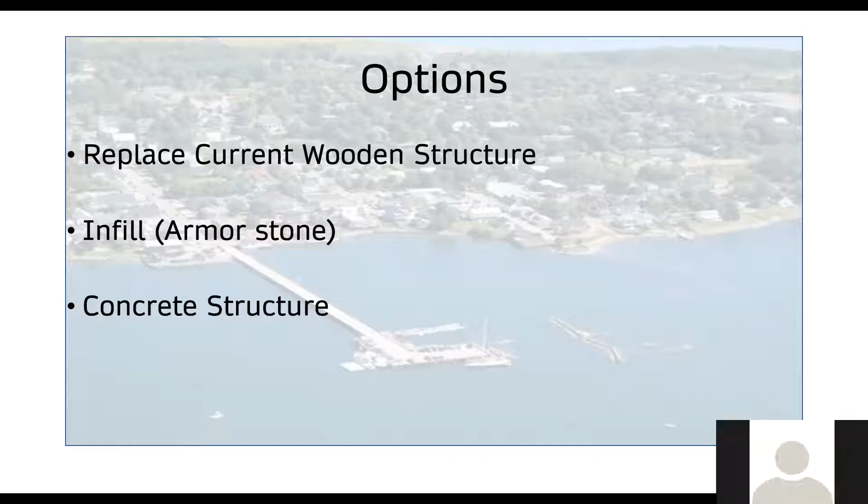Tonight we're going to look at 3 options that came across our boards over the last few months. One is to replace the current wooden structure, pulling out the approach, roughly the first 70 to 100 meters of the wharf, and replacing it with more wood. The next, the hotly contested one, is the infill or armor stone version, which we'll have some different concept drawings and renderings to look at tonight. The final option is a concrete structure that has been brought forward, which can also be looked at as more traditional in its look, but has a superior quality as far as its longevity.

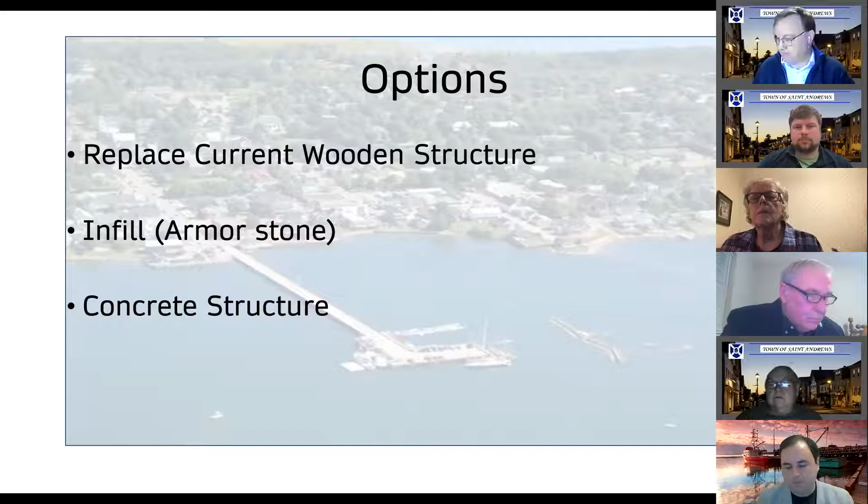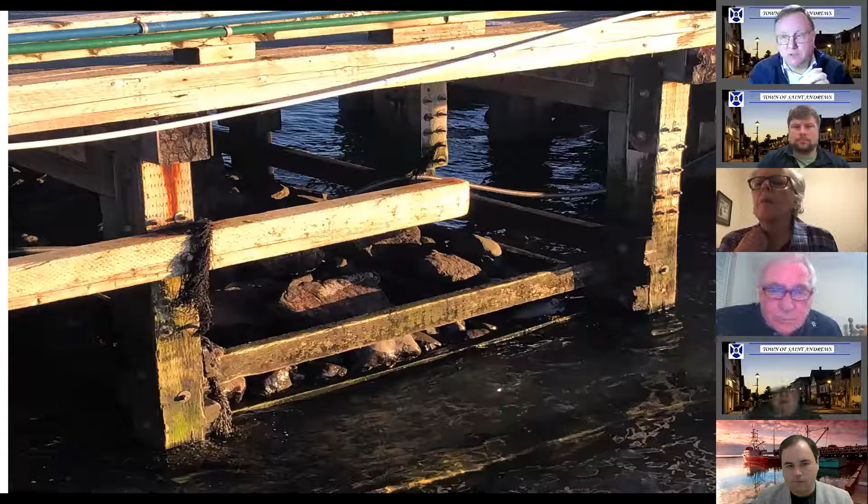So we're going to jump right into the wooden structure. This is a picture of our wharf taken today. As you can see, the structure essentially is 10 by 10 posts on the ground that have ballast boxes at about 50-meter intervals, with large rocks that basically stabilize the wharf. If you just had the wooden piles on the outside holding it, the wharf would likely suffer from wave action. So back in the day, they designed these rock cribs to stabilize it against the tidal action, as far as I can tell.

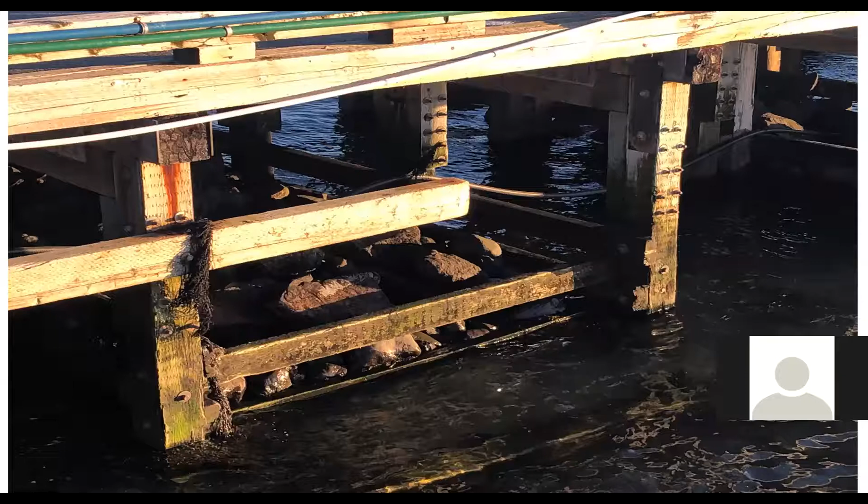Now, to do that work just on the wooden structure, you're talking about $3.4 million upfront cost. But because it deteriorates much faster than other options, the 60-year life cycle cost is actually $6 million, which is a significant price tag. Essentially, we'd have to replace that wharf once over, on top of the repairs and maintenance we'll be doing over that 60-year life cycle.

Now, the pros that a lot of people like is it does maintain the original look of the wharf. The town is based highly on heritage and our history, and people think that's a really important aspect, and staff understand that. Of course, it'll blend in with the remaining structure much better. But again, we're just talking about the approach, the wooden structure that makes up about the first third of the wharf. The problem with that structure is it's harder to accommodate for sea level rise.

The price we have right now, the 3.4 million, doesn't accommodate for that. They're going to have to do a little more studying to figure out how to make that work. And as mentioned earlier, the wood deteriorates much quicker, so sections of that wharf, as we've had to do in the last 10 years, would likely have to be replaced after 25 or 30 years, until the whole use of the wharf was deemed unsafe. This won't mean much right now, but we'll get into it in a bit — there's going to be a smaller width of the wharf compared to the infill structure.

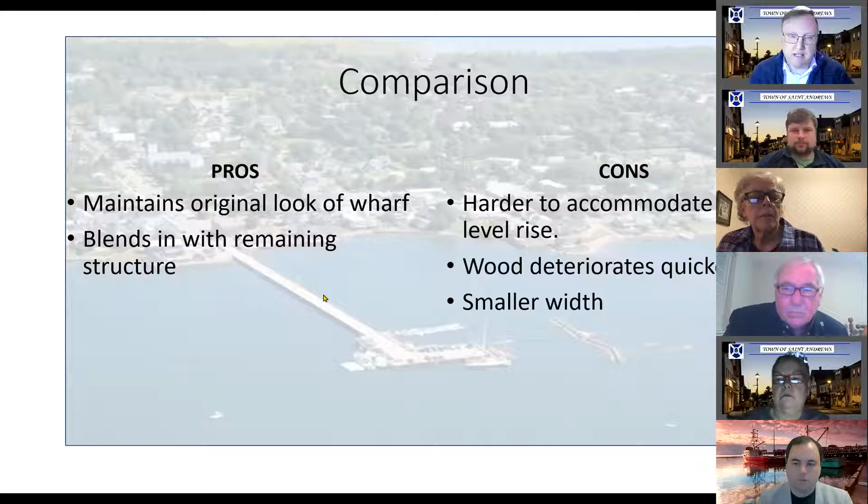Now the next one we're going to look at is the armor stone infill to replace the approach. So again, the first third would be armor stone out to the remaining concrete and steel structure that we know today. A lot of this was already presented back on December the 14th.

So we did make some changes as requested by council, primarily regarding this building. Can you guys see my mouse? You're not showing. Yep, okay.

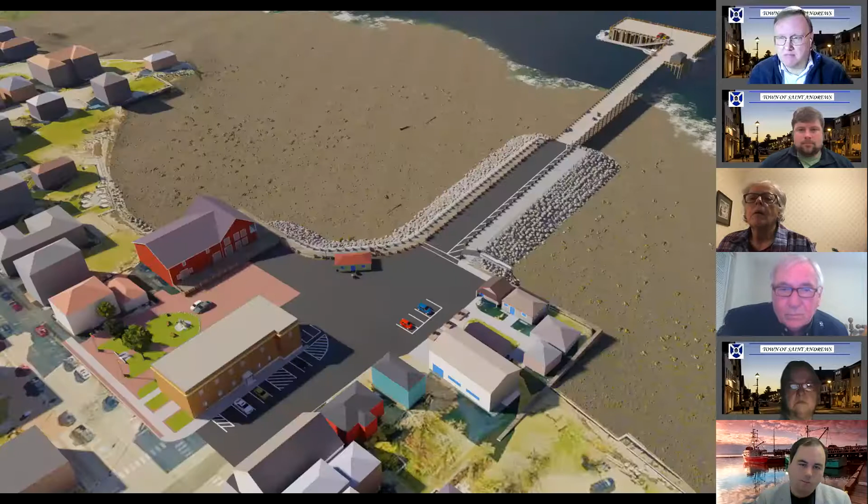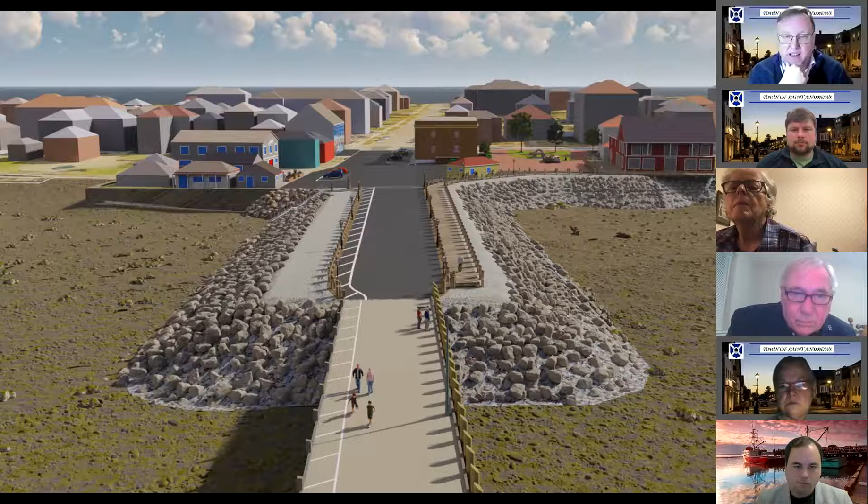In the middle of the picture, you can see what we'll call the Island Quest buildings at the corner of the wharf, on the upper side by the Anchor Restaurant building. You can see it's to enhance the view, so if you're coming down King Street you get a better view of that. Coming from the other direction, from a bird's eye level view, if you're standing about 20 meters above the shack, you'd see that the wharf is tremendously wider. As you can see, and we'll show pictures later, where the people are walking is the width of the current wharf — the inside lines on the left side, and the inside of the walkway on the other, mark the width of the current wharf, which is the outside edge of it. So you've got a tremendous amount more width that can accommodate so much more potentially going down the road.

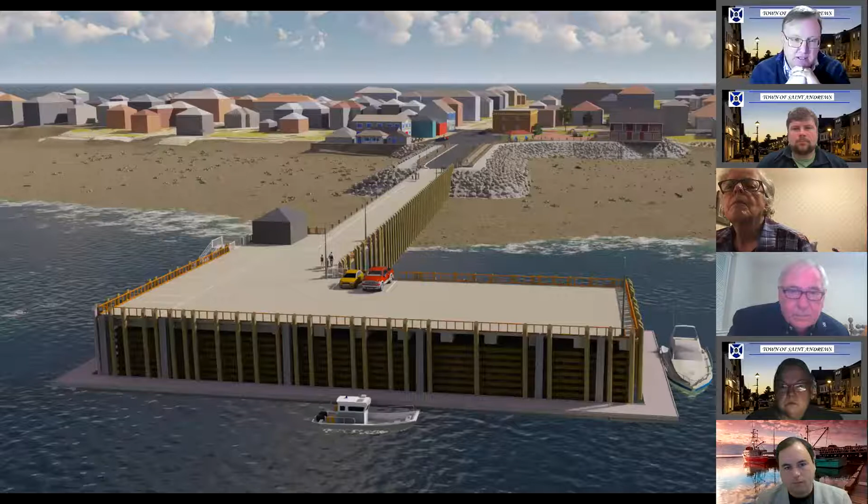Councillor Grew had asked about a staircase on the other side. That's not recommended because, as Councillor Gubershall noted from talking to staff, it's really mucky on the other side of the wharf and people have lost boots there. Even though it's relatively close, it's a completely different type of topography, so it probably wouldn't be safe to send people over there.

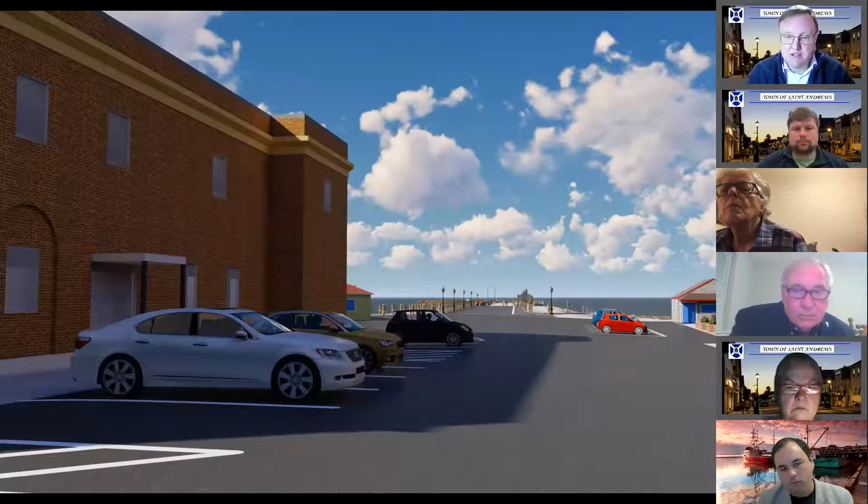This is the view from the corner of King Street and Water Street with that building removed, allowing a much broader view of the water. This is important to council for the street ends, providing a panoramic view for tourists, visitors, and people approaching the wharf from Water Street for the first time or the thousandth time. It gives a much wider open concept view, with Navy Island visible on the other side, providing a great environment to look at.

This view is essentially if you're standing on a ladder in the middle of Water Street, almost on top of the Red Herring building, showing how it looks from a bird's eye view.

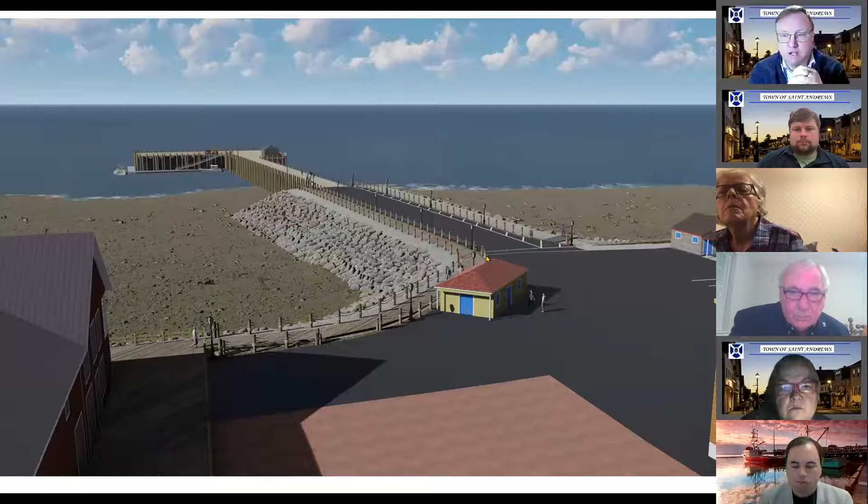It should be noted how much larger the square is too, which is beneficial not only for farmers markets but will allow for a little bit more parking for events like Canada Day and other events such as Paddle Fest hosted in Market Square. It's certainly going to provide a significant amount more space for them to work with and to host events.

If you're standing on the wharf, this rendering shows what the rock would look like from a normal person's point of view. As you can see, although it's visible, it's not taking away from the viewscape very much, especially with the posts along Market Square and along the wharf that maintain the nautical theme, along with ropes that also maintain a safety aspect for anyone going along the wharf.

Now, the change in width as discussed earlier: the current deck width is 7.2 meters, and the infill option with the prices we show is the only one that allows for a wider wharf. With the infill, it increases the width to 22 meters, or 72 feet, so you're getting almost 3 times the width, which is great for safety.

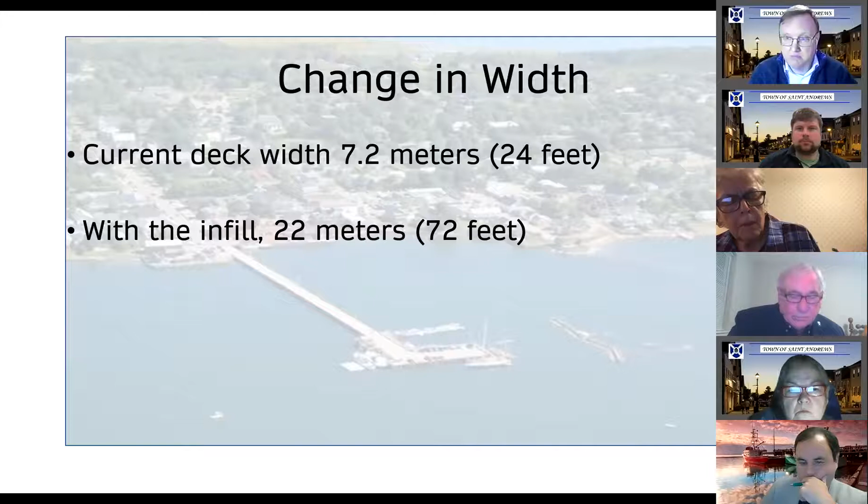It's also good for some of the options we've talked about, like increasing more seating along the wharf, or even having ticket booths or some type of retail as you first go along the wharf. Really, this is the only option that's going to make that viable with the current budget we have to operate with.

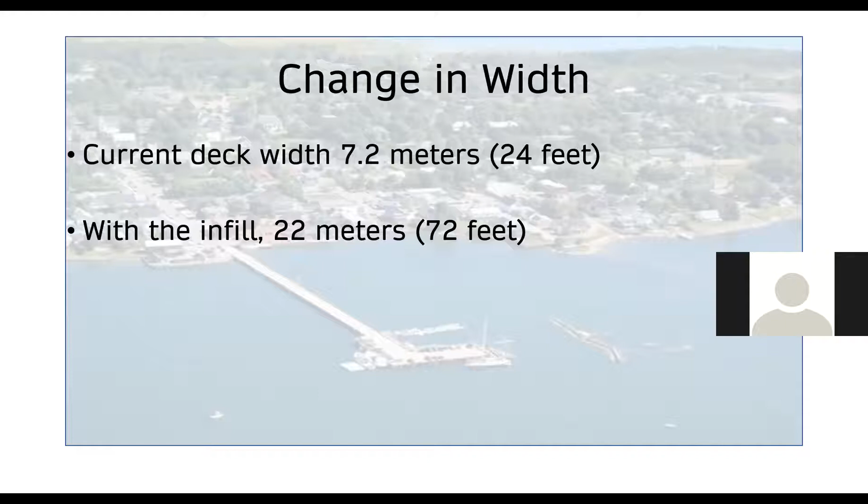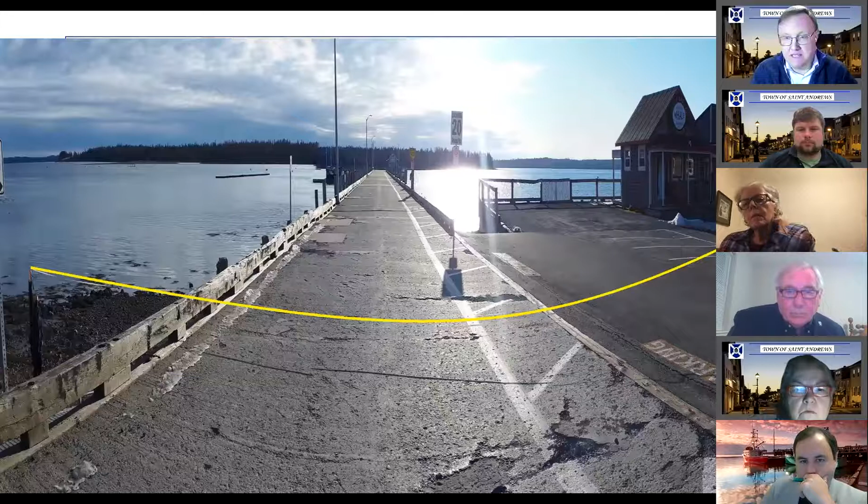Is this really showing what the width of the wharf is compared to the current wharf? That's Terry Acton on the left there and me on the right. As you can see, the current wharf at the top is going to be going from the front of the parking lanes there on the right over—this picture will show better. Whoop, didn't bring that picture, I guess. Oh, there it is, sorry, skipped it.

So the same thing—it goes about halfway to where the current Island Quest building is, so it's a significant amount of width being added. It's got pros and cons. From a practical use, it's going to give the ability to do a lot more on the wharf. The negative is it may not be as visually appealing. Again, it's been raised, and staff are going to have to ask the question eventually about what this rock interface will do to the tidal flow in that part of the bay.

From a cost perspective, in today's dollars, in order to do that infill you're looking at about $3,183,000. The 60-year life cycle cost of that is about $4.5 million, so significantly lower than the wooden structure we discussed a little earlier.

As discussed, the wider width does allow for more uses, and there is a lower cost. The other important thing is that if we assume the current sea level rise modeling continues as predicted, in 50 years we're going to have to raise the structure another meter—essentially just putting more rock and gravel on the current structure to raise it another 3 feet.

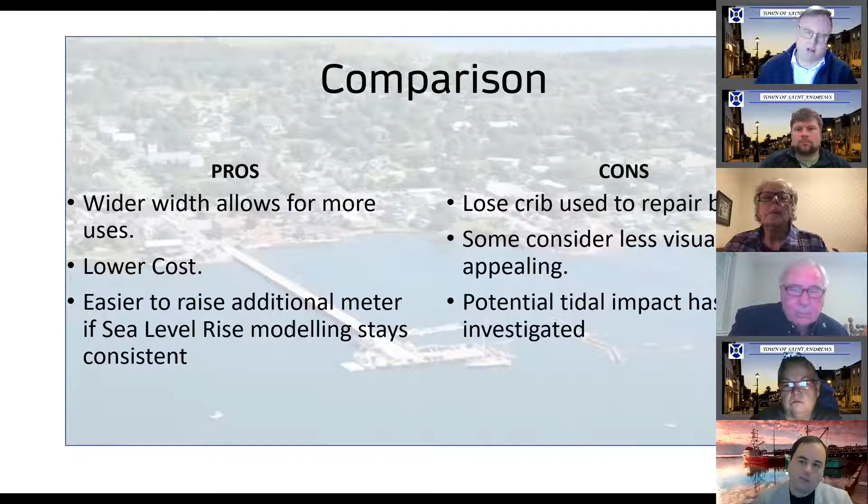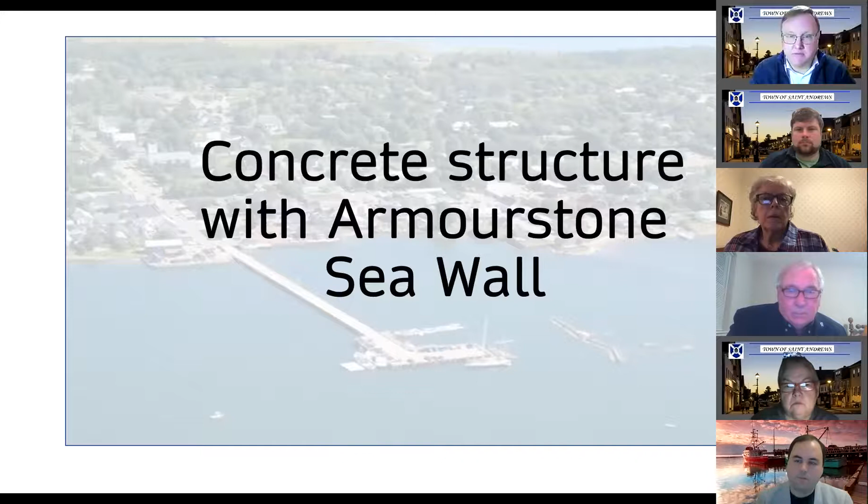As you can see from this aerial view, the Armourstone seawall just goes out a little bit from the shore, and the concrete structure - you'll see better in future pics - almost looks exactly like the structure we have now. Those things vertically dropping down from the deck are actually the pillars being locked into the ground.

Here's an aerial view of the same thing. Again, much less space being utilized, but it's also more appealing, and it kind of fits into the current structure of the wharf. In the side view, you can see the staircase is still maintained, but you're seeing the type of structure being used there.

So cement-reinforced poles are being put into the ground for the length of that third, but the space is significantly lower. What isn't included here is that if we're going to put those sacrificial pilings - those traditional, almost like telephone poles on the outside of the wharf - that hasn't been included in the quote.

So standing from the middle of the wharf, you can see that it again maintains a very traditional look. The current wharf even has a concrete top, so from above it'll look very, very similar.

Again, from the corner of King and Water, it looks very similar, potentially more visually appealing, but again, no gain in space on the wharf.

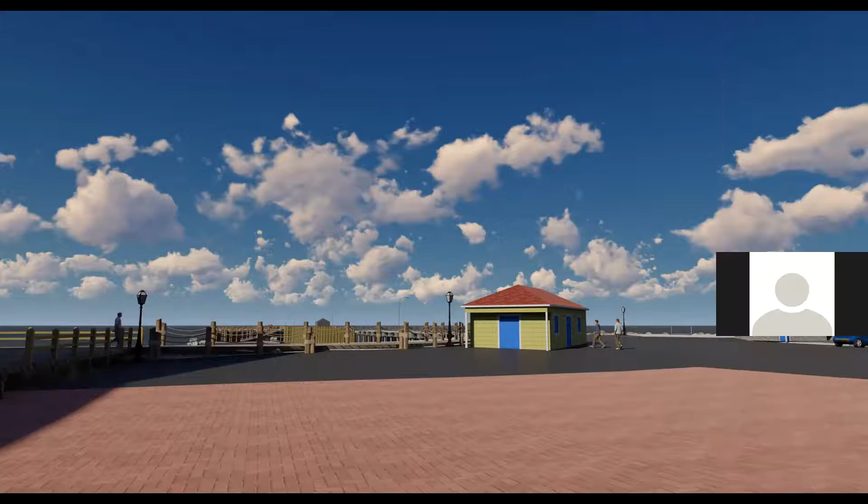From Market Square, you can see it's a very low visual impact for any of the visitors, tourists and residents. And the flow of the water will continue below that, so less environmental impact, I'd assume. This one isn't a lot more expensive, but it's still the most costly at $3.446 million plus HST.

But the 60-year life cycle cost, because cement will deteriorate faster than Armourstone and is harder to replace, is still $5.3 million over the life cycle. And I should have mentioned this earlier, but the life cycle cost actually includes all costs, including labor, and includes some of the operating costs of running it.

So the pros of this potential style is that it resembles the traditional style much more. In fact, most people probably couldn't tell the difference. Visually, it transitions to the pier head much better, and there's less impact on tidal flow. The con is you do lose the extra width for the walkway.

So from a summary perspective on capital cost, the wooden structure is 3.4 million, the infill is 3.2, and the concrete structure, the most expensive, is 3.45 million.

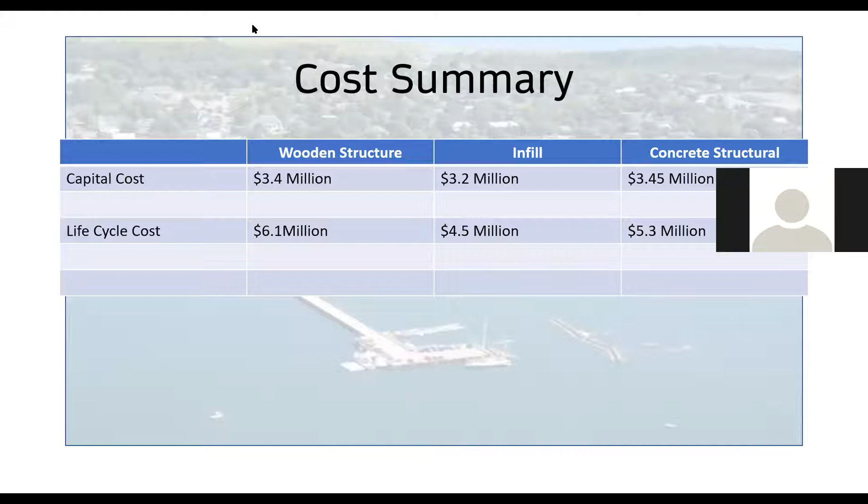And I guess my next question, for the other two options: am I then to understand that they're the exact same height as current, or would we just build in another 1.5 feet now?

So actually, and I didn't explain it really well, the concrete structure has the other half meter built in early on, so that's already got the first. The wooden structure does not, and the engineers misunderstood me when I asked them, so they couldn't come up with a price really fast to raise it another amount, but it's going to be a lot more than the 3.4 million you see. So that cost will go up additionally, and I can ask them to revisit how much the total cost on an equivalent basis is going to be, at least on the height.

And I'm not sure if this is fair, because I don't know if you've looked into this, but do we at all know the cost if we ever had to reverse an infill option, how much it would cost to pull all that stone out?

Well, when are you going to do that, I guess? So long story short, I'm not trying to be hard to get along with. I'm just trying to say inflation, but you're probably talking $200,000 or $300,000 just to remove, and then the remaining two options to replace, type of thing. But that's a real ballpark by me.